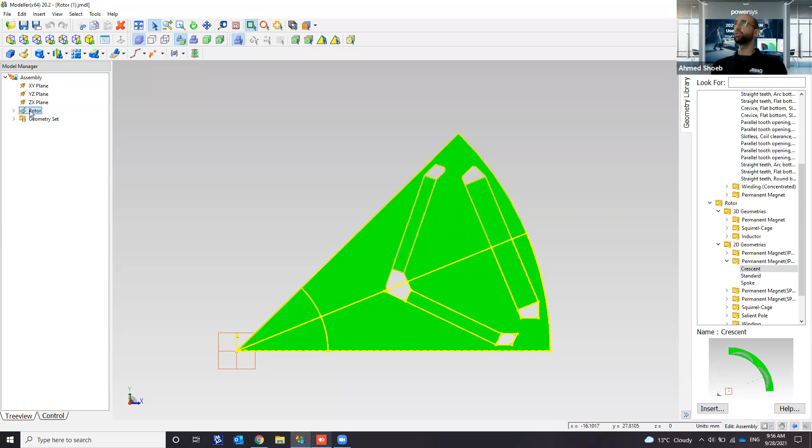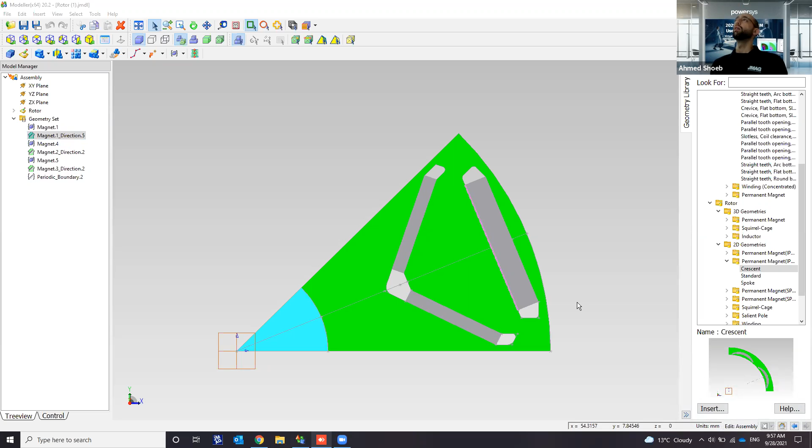So as you can see here, I have my rotor model, something I have created. I've imported it into JMAG. One of the new features is that now I can set up the magnetization direction directly inside of the JMAG modeler. This will also help if I am changing the number of slots and poles, or changing the number of magnets, that the periodic boundary and the magnet directions sort of stay the same between different models.

Also, one thing that I would like to highlight here: implemented into the JMAG library are all of the old templates that were available in JMAG-Express. So now you actually have them within the geometry library itself.

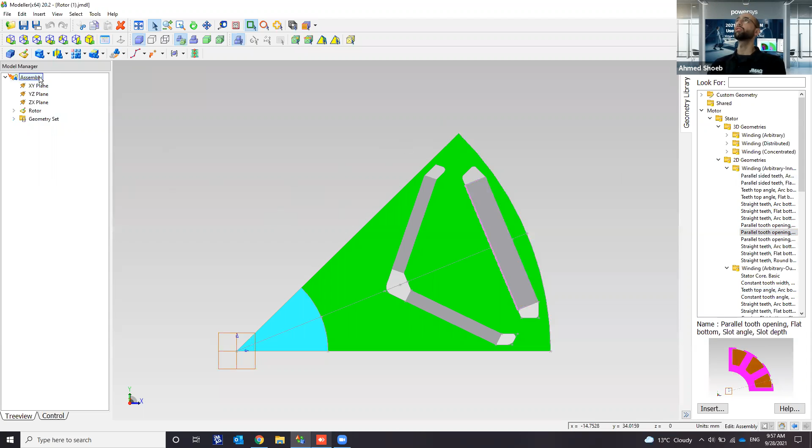Okay, so first of all, to import a model like this inside of JMAG-Express, we first have to add to the geometry library here, and then just give it a name. I'm just going to call it Express Rotor. Oops, spelling. And then I have to give it a tag of motor brushless IPM inner rotor. So it just has to have a tag so that it actually organizes it into the correct position.

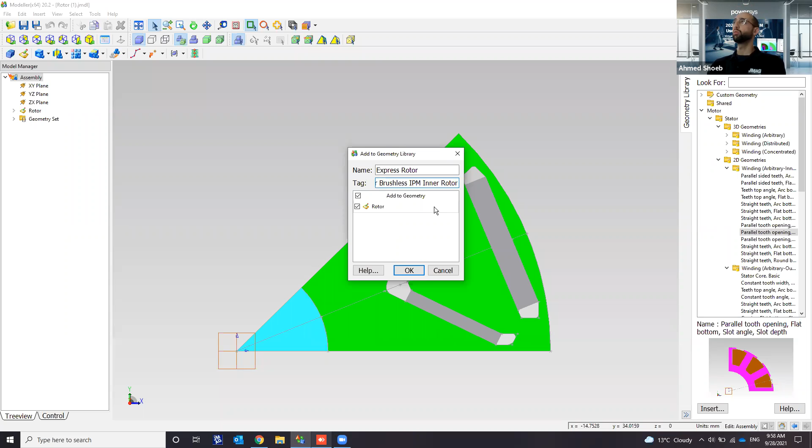Press OK. I actually have this saved somewhere else. I'm going to cancel for now just to not delete the one that I have. And then afterwards, I can open JMAG-Express 20.2. As you can see, the interface is a bit new from the older one. Here I have some of the recent templates that I was working on.

If I check the options here, now I have the capability of actually using more than one core to do my calculations, the number of parallel jobs. So you can actually create efficiency maps within JMAG-Express, and this is the number of parallel jobs you can create. For my case, because I have one transit license on this machine, I'm only allowed to have one, but you can go up to 6.

And then, of course, because this is my laptop and I only have one license, it's just offering one, but you can actually go a bit more. This is basically just to decrease calculation time. Cancel for now, and then I'm going to start building up my model.

So I'm going to do model combination here. And basically what I'm going to do is select the rotor that I've already created, but I'm going to be using a basic stator core that is just available, and then I'm going to modify it afterwards. And press OK.

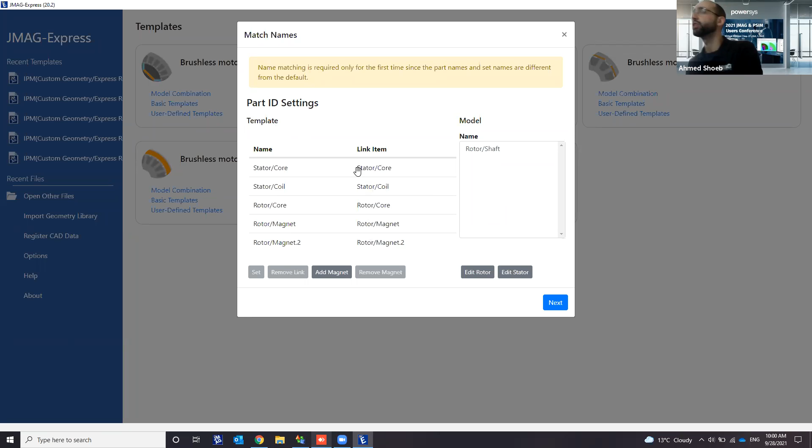Then I'm just going to have to link some of the elements. So the part IDs are actually here, sort of already linked. You can press next. Then the periodic boundary, I just have to relink it to the correct one. And then I have to set up magnet directions here first, and then for the second, and then OK. It's going to take a moment for it to open.

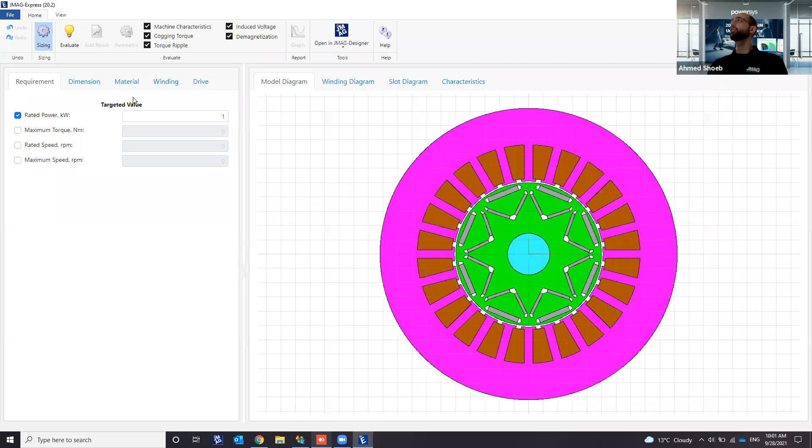Okay, so as I previously mentioned, JMAG-Express now is a new interface for JMAG-Designer. And what is the goal here actually? The main idea is to offer people an easier way to do machine design without having all of the experience that usually is needed. So here I have a very basic shape, and if I am somebody who doesn't have much FEM experience, I'm just going to know what my targeted values and parameters are. And here I just input some target values, so the sizing of my motor.

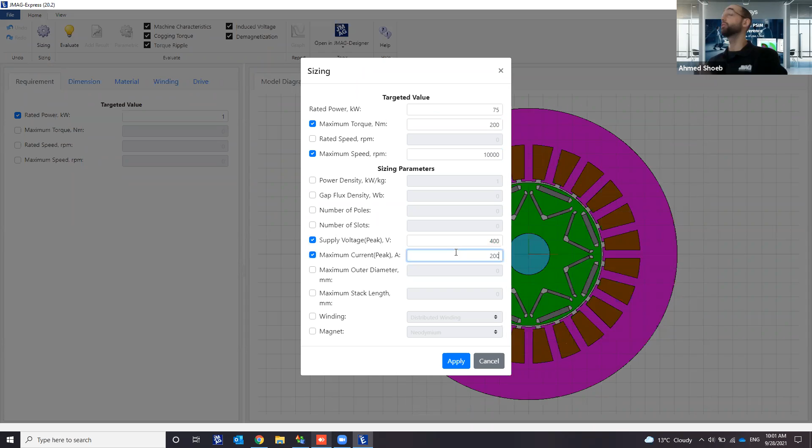So I have an output of 75 kilowatts, maximum torque of 200, maximum speed of 10,000 RPM, peak voltage of 400, and a maximum current of 200. It even gives you warnings if you're putting unrealistic values. And what JMAG-Express is going to do now is change the size of the motor, number of poles, number of slots, according to the sizing parameters that I have input. As you can see here, to reach this, the number of slots has been changed from 24 to 48, and JMAG-Express automatically calculates it itself.

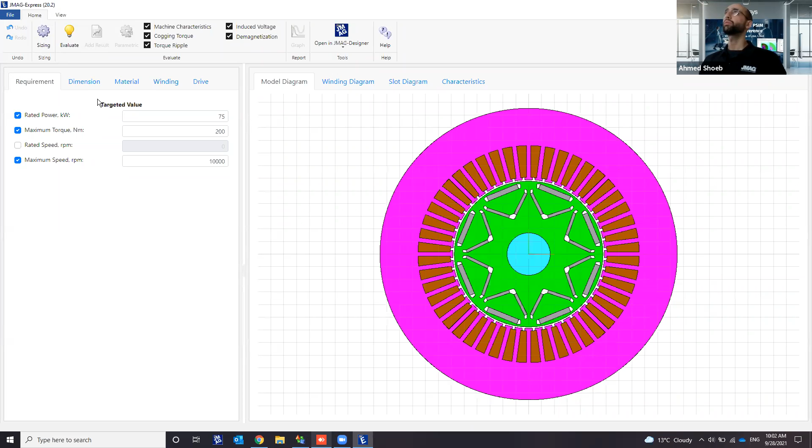Here are the dimensions that I think you should be familiar with. It's just inputting the dimensions, number of poles, number of slots, the tooth depth. You can change all of these parameters as much as you want. Of course, it's again going to complain if you're giving something unrealistic. Then I'm going into the materials tab. And one of the nice features is that you have all of the materials from the material database, so it's not limited as before.

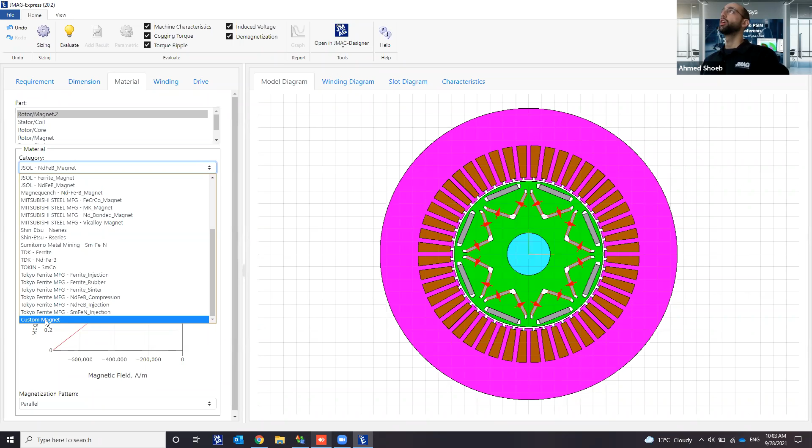At the same time, if you have any custom magnets or custom steel sheets that you have created within JMAG-Designer, you can implement them into JMAG-Express. So you actually have much more flexibility than before regarding your machine design.

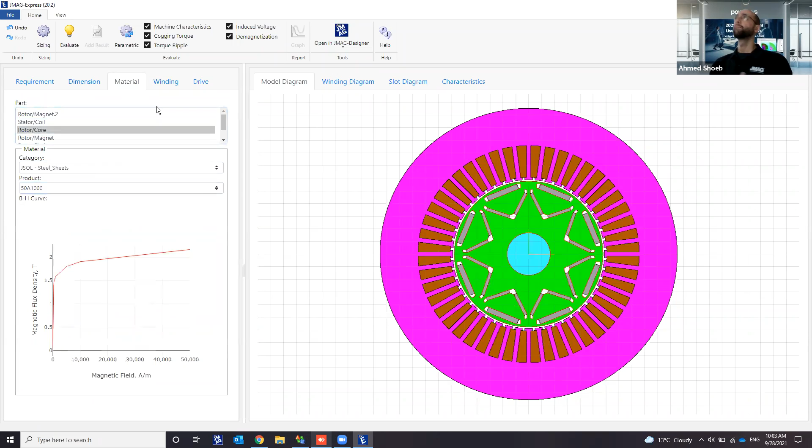I'm going to leave everything to the default settings, but the same applies also for the core. Here you can also input custom steel. Then you have a preview of your winding. This is nothing new. And then lastly, the drive.

One of the main things that I want to highlight here is that JMAG-Express does several calculations now. It's not just a basic 1 second calculation like before. So now you can calculate demagnetization, induced voltage, machine characteristics, cogging torque, and torque ripple. For now, I'm going to start with just machine characteristics, which is going to give me the torque speed curve, the efficiency map, and the output power curve.

I cheated a bit and prepared the calculations in advance, just for the demo's sake. And if I go here on this machine, this is how it looks after it finishes the calculation, same machine, same motor. As you can see here, I have my output torque speed curve, my output power, and my efficiency map. The efficiency map generated here is actually the same efficiency map as the reduced order model you can create in JMAG-Designer.

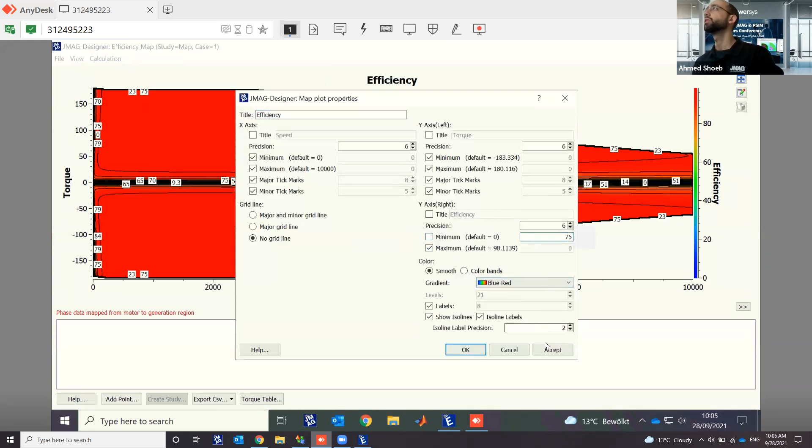So let me just open it here. Takes a second sometimes. Oh, it's not opening. I'm clicking it wrong. Yeah, there it is. So now we have an efficiency map. I can change the minimum to 75%, just to make it look a bit nicer.

And I can afterwards output a CSV file with all the efficiency map points, or export this as an RTT file, which I can then use in the new integrated circuit feature. So it's actually quite flexible what you can now do with the efficiency map, and it's not just an efficiency map you get and that's it. Moving back to Express.

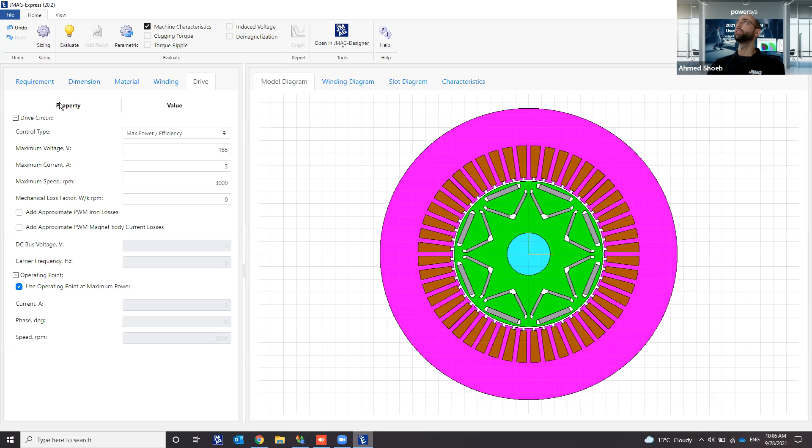So now our goal is going to be to increase the output power. Something basic we can do is just increase the magnet thickness of the lower magnets here. So I go to dimension, then I go here. Wait, where was it? Yeah, this one here. And then I change it, for example, to 5. So very thick. Takes a second. And now I've changed the thickness of the magnets, and I can re-evaluate again.

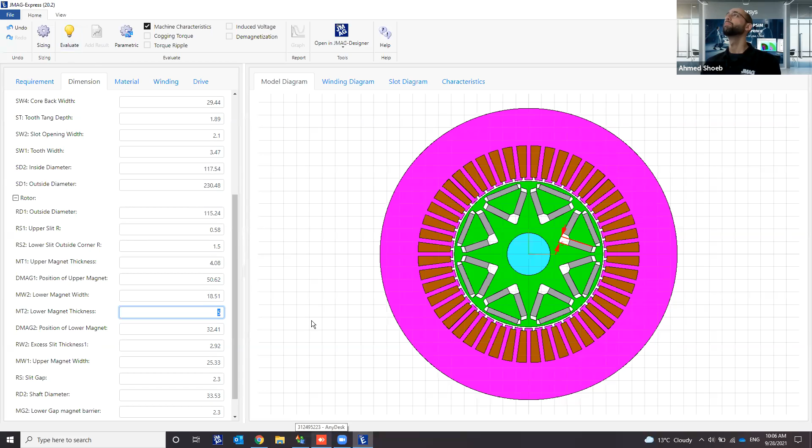It's actually this button here, sorry, I didn't mention it last time. Once I click on this button, I have the second curve here. You can see that my output power has improved, or it's getting closer to the desired value that I need. And I'm getting a second efficiency map, which is the efficiency map of the second case. So it's similar to what you did before in Express, just changing some dimensions and seeing how that affects the result in a parametric way.

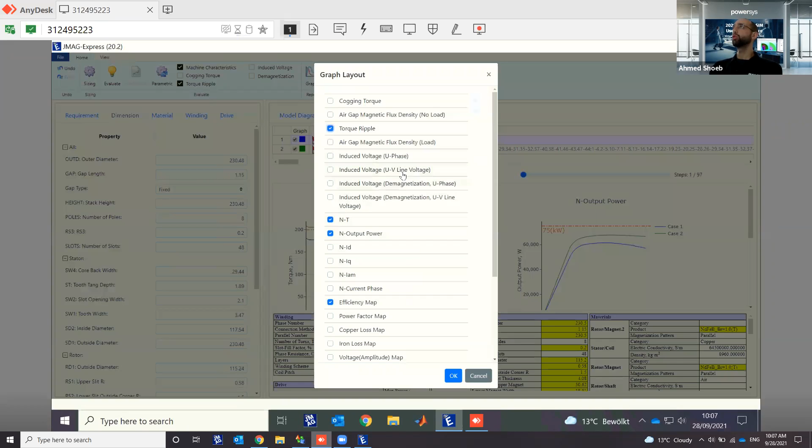Last thing we're going to evaluate is the torque ripple. We just want to calculate the torque ripple, and once I click on this button, I can just add the result, and it goes much faster than evaluating everything from the beginning. So if I check my graphs here, I have my torque ripple. I add it. I can see the torque ripple of both cases.

What I can also do is check a contour plot for the flux density here. This is case 1, case 2, I can go to case 1 here, for example. It's going to open a window inside of Designer, showing all the calculations that I've done, having, for example, here the torque.

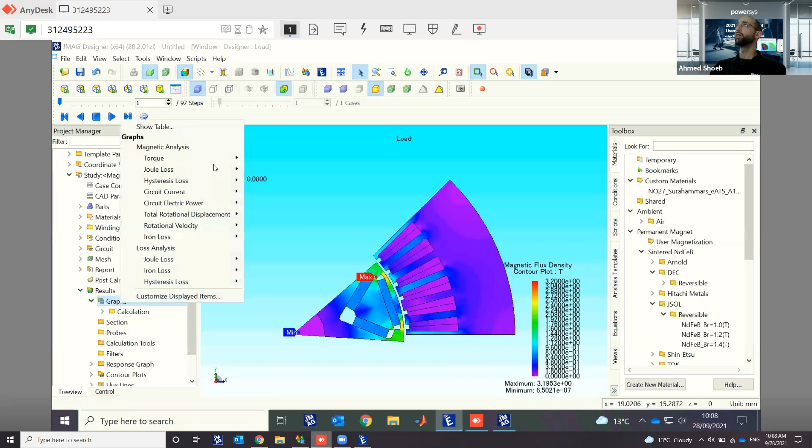And if, for example, I want to test what will happen if I add a skew to the rotor, I can just quickly do a skew graph, skew angle 7 degrees, change it to maybe 3 steps. I put them side by side and change the range to be equal. So this is up to 125. This one is a minimum of like 65.

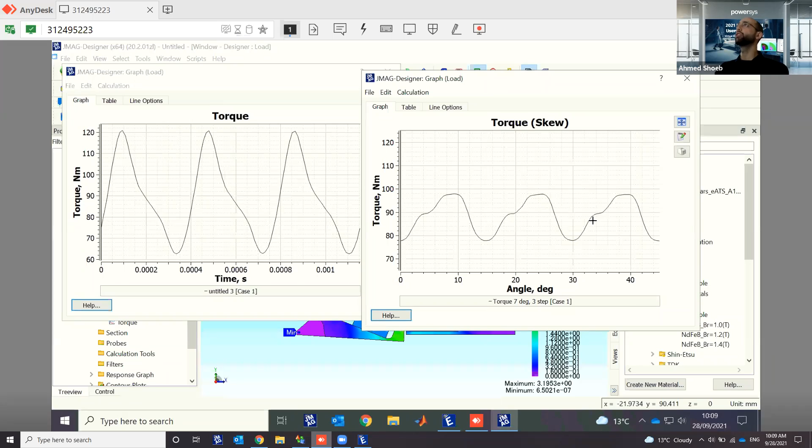And you can see here that the torque ripple has improved a lot. And the main message here is that you can actually, from Express, go quickly into Designer, see if you do some minor changes. You can seamlessly check a few things quickly.

The last thing that I wanted to comment on regarding the new Express is actually the capability of switching to Designer directly. And if I click on Open in Designer here, what it's going to do, it takes a second. It's going to save first.

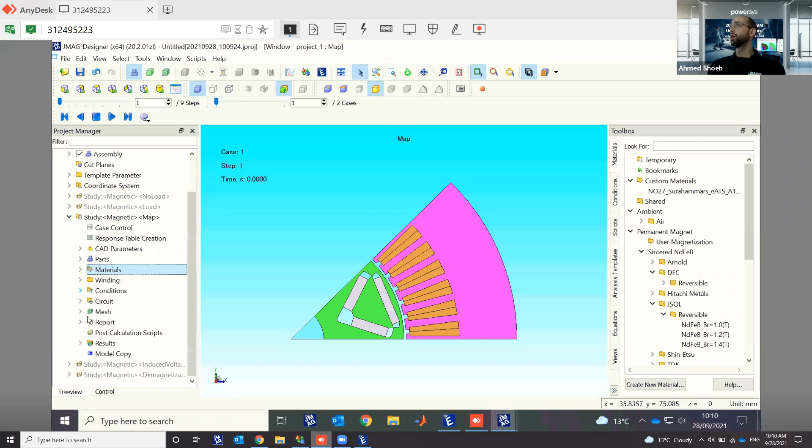So what it's going to do is that it implements all of the studies that I've already run. So if I had clicked, for example, on the cogging torque analysis, I would have gotten some result in the no load, but I focused on machine characteristics and torque ripple. So I have a result in the load calculation. I have a result in the efficiency map calculation. And it's the same result.

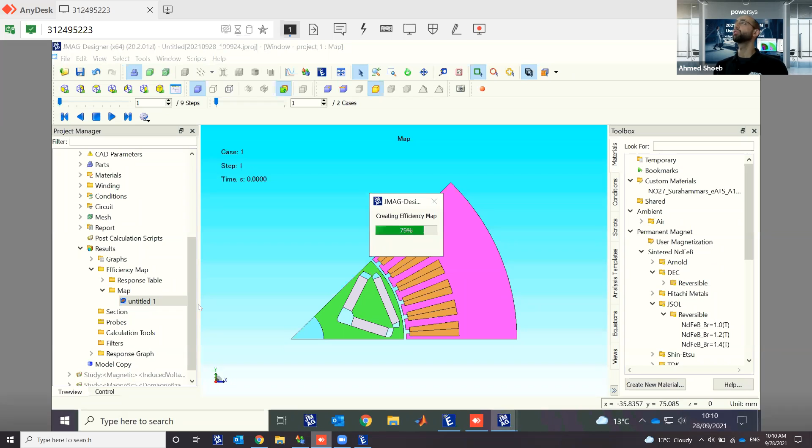So as I've mentioned several times now, it's mainly a new interface for JMAG-Designer. And the whole goal here is just to make it easier for non-FEM experts to quickly go into JMAG and to quickly change some design shapes and test the effect of each one of them.

So we didn't delete that as an option if you want to use what we call the classic version of Express, the older version. But the thermal aspect will be implemented in the future. So don't worry about this, but just be slightly patient. Okay, thank you. So just to summarize, in case you need temperature, please use the previous version of Express, and it will come in the new one soon.

Okay, maybe I have questions regarding the calculation. It seems that some calculations, so now full finite element calculations, are run under Designer. I guess there are some assumptions behind. I mean, mesh, time step, etc. All those are done automatically by the new version of Express inside Designer.

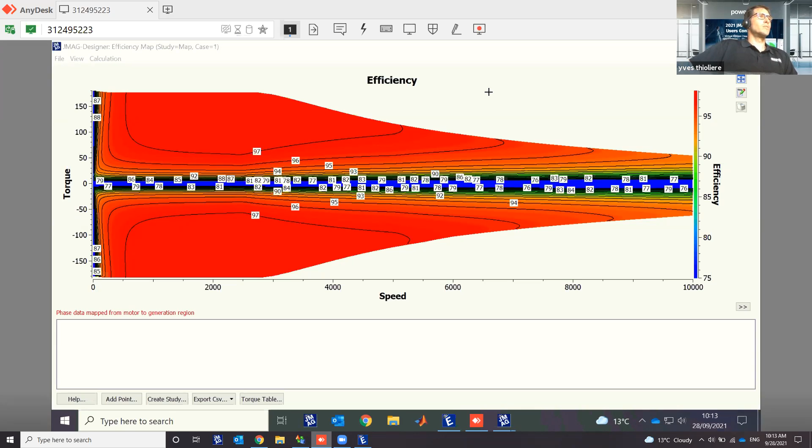What kind of assumption? How can we check that? I would like to know if the user has a possibility to tune that, or it is just simulation knowledge that is given by JMAG and we cannot tune that. So at the moment, you cannot tune those directly inside Express.

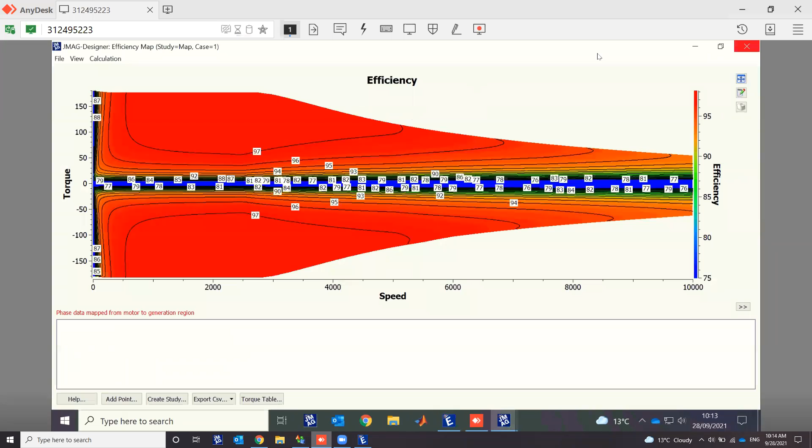So we ensure that we are able to correctly model the torque ripple using those kinds of rules. And I think those have been rules that we have been using and recommending for quite a while as well. And the mesh is also created automatically.

And you will see it will always use the periodic mesh in order to ensure, again, the symmetry of the torque ripple. So obviously in Express itself, you don't have access to customization too much, because we don't want to confuse for the moment the user that has no knowledge about FEA with too much detail.

But actually, once you've created your model and you want to have a more detailed calculation and have more access, as Ahmed showed, you can very quickly go into Designer, and afterward you're free to continue in Designer to do your calculations. But in Express, we try to keep the number of variables that the user changes to a minimum, to make his life a bit easier. Okay, thank you.

There is one more question from the Zoom interface. Could you please tell us about loss calculation: iron loss, eddy current, and other losses? Yeah, I guess this is using the classical ones, which are the quickest, and then you can also tune that in Designer. Yes, exactly. Since everything is pure FEA, it basically uses the normal iron loss.

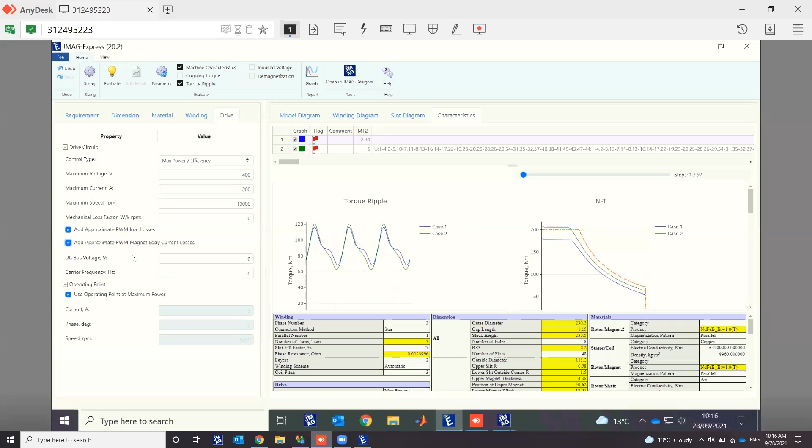I would need to double check for the ROM how we calculate it. At the moment I just forgot how we calculate it, but I could come back to Abdullah Sanchal afterward on this. And for the efficiency map, you have access, like in Designer, to algebraic approximations of PWM losses and magnet losses, by changing the DC voltage and the PWM frequency. So those are algebraic or analytical approximations of the losses. But for the ROM, I will come back to him directly if he wants more precision.

Okay, thank you. So basically it uses the classical Bertotti-based model. Yes. And then if you need the more advanced ones, like a hysteron play model or eddy current in steel plate, then you tune that in Designer. Okay, thank you.

Maybe Ahmed, you also talked about the efficiency map. It seems there are also some reduced order models. Could you give us some details? That could make the introduction of your next presentation, because we will also have a presentation about the enhancement of the efficiency map. Maybe you could just give first information.

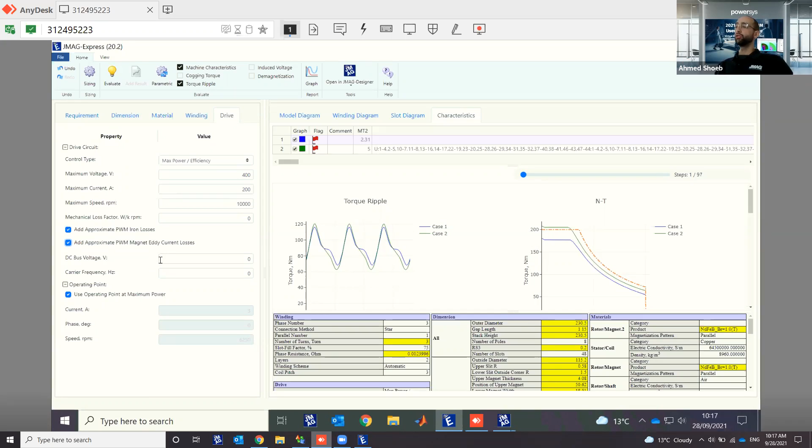So basically, in JMAG-Designer now, there are 3 types of efficiency maps. You have the ROM, which is reduced order model. This is the one that is actually run here in JMAG-Express, and it is also available in JMAG-Designer, which is this map calculation here. If I click on edit, you can see reduced order model. The second one is speed priority mode, which all JMAG users should know. This is basically an FEA calculation over several current and phase points, and then you have some frequency scaling regarding the losses and the voltages.

And the last method is accuracy priority mode. ROM and speed priority mode have their limitations. They're very accurate, but if you want to reach the 1% accuracy range, you should go for accuracy mode, which is a full FEA calculation with no limitations. And you can combine accuracy priority mode with a control circuit, or a combination of JMAG RT and control circuit, which makes it go a bit faster. I think that will be it for now, and we're going to go into more detail on this tomorrow.